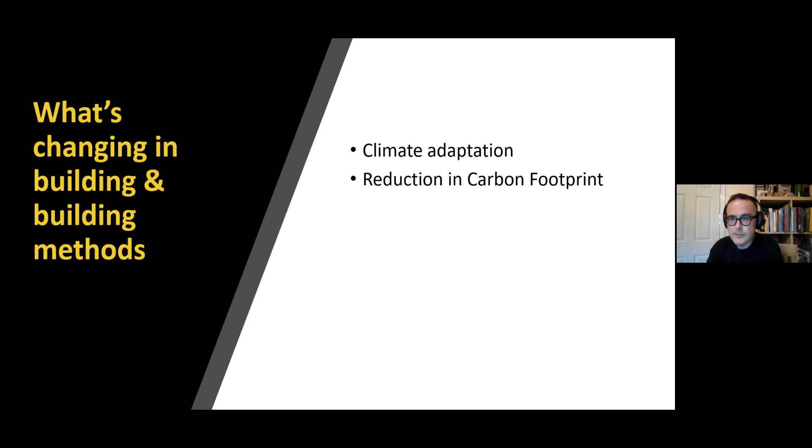Well, first of all, the reason why we're looking at the whole issue of efficiency and energy efficiency within our buildings is to deal with the whole issue surrounding climate adaptation. I think we're all familiar with that. It's been one of the highlighted topics in the United Nations General Assembly meeting this week, and has formed a major part of government policy here domestically as well as internationally. We need, of course, to reduce the overall carbon footprint of the economy and the domestic sector. And indeed, that is leading us to looking at new methods of building, new products for building, etc.

The age-old problem of housing demand and the need for additional building stock. This is coupled with the need to improve existing buildings, and that formed the major announcement from the Department of Housing there recently in relation to the Housing for All strategy document. Again, we're all familiar with the fact that housing demand is at a peak here in Ireland, and not just within the Dublin region. But equally, if we look further beyond our own shores, this is a major issue internationally, as well as nationally here as well.

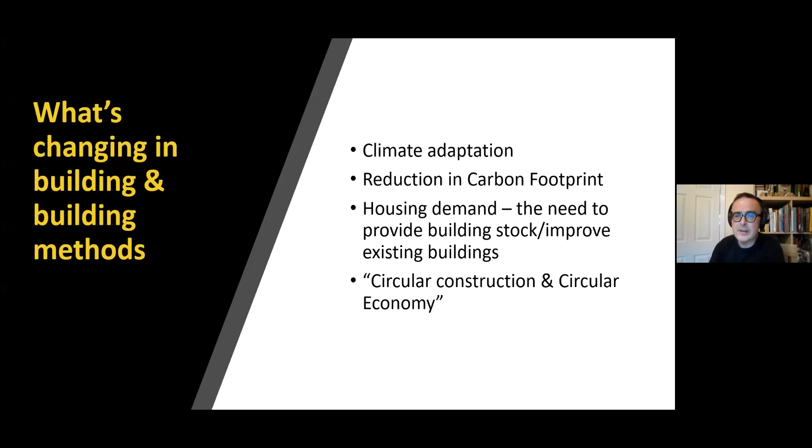And then finally, we have the issues around the circular construction and circular economy cycle. And I don't know if any of you or most of you are aware of this, but I will just basically recap on this.

Moving back to government policy and indeed the direction that the government and indeed the industry are heading towards, the Irish government produced a very, very ambitious document back in 2021, which is the Climate Action and Low Carbon Development Bill, which is a unique document in the sense that it transposes aspirational goals into legislation and commits Ireland to achieving net zero emissions by 2050 and securing a rather ambitious target of 51% reduction in emissions by 2030. Now, you realize the scale of that ambition when you realize that we are almost 3/4 of the way through 2021. That means we have approximately 8 years and 3 months to go to meet that target. So as I said, it is ambitious.

The action to achieve this, of course, as everybody knows, will see, first of all, an increased electrification of both the heat and transport sector.

We'll be looking at improving energy efficiency within buildings, reducing emissions from agriculture, and developing clean public transport. Now, while I won't bore you with item number 3, the reducing emissions from agriculture, because clearly I have very limited expertise in that, tonight's talk will be looking at various issues around item 1 and item 2. I think I'll leave the discussion around cleaner public transport for those that are more qualified in the area of transportation.

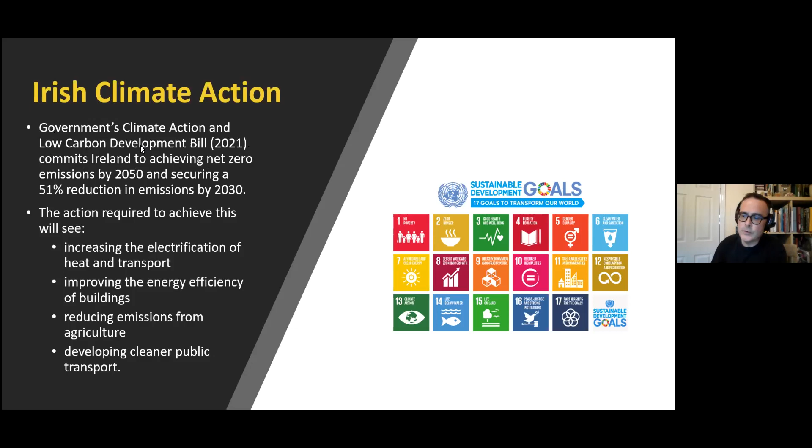If we look here to the right, I'm sure everybody has seen this statement here, the 17 sustainable goals that have been produced by the United Nations. And that again provides the cornerstone to this particular document. As I said initially on the third slide or so, the whole issue behind the circular economy and circular construction is where we're going to go, whether we like it or not. This is a case where it'll cause us as engineers to rethink what materials we will be using within the various structures that we actually design and ultimately build.

To recap, circular buildings are buildings that are designed, planned, built, operated, maintained, and deconstructed in a manner consistent with circular economy principles. And there's a very good article there from the Irish Building Magazine in 2020 outlining how embracing this circular economy model can add value to the Irish construction sector. But we're all very familiar with the production cycle, and I'm just going to talk about this very generally. We all start off with raw materials, which go into a production plant, ultimately leading to the product being ready for distribution and sale. The product is then taken and installed. It goes through its design life, and it's maintained during that design period. So we're familiar with that green path.

Now, this is the path that's relatively new, in the sense that after the maintenance period, once the product has met its end of life or can no longer be economically sustained, or there's a change of use in the building which renders it, I won't say unfit for purpose, but certainly not desirable, then you have to go through the process of removal and the disassembly line. But this is where it becomes relatively new, in the sense that you're looking at using materials that can be maintained, removed, disassembled, and recycled. And this is, I think, the most challenging part of this model. How do we design products that are serviceable, easy to use, easy to maintain, but also easy to remove, disassemble, and then reincorporate back into the in-use cycle?

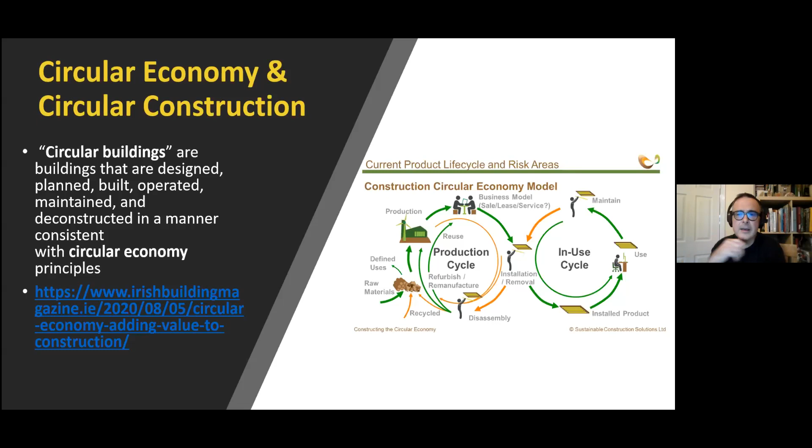As engineers, this is going to present us with significant challenges. And as I said at the very start, we have a major housing crisis in terms of supply, but equally as well in terms of retrofit. How do we make sure that the products that we put in to retrofit a house to improve its energy efficiency can slot into this particular cycle? Hopefully I'm not losing anybody so far.

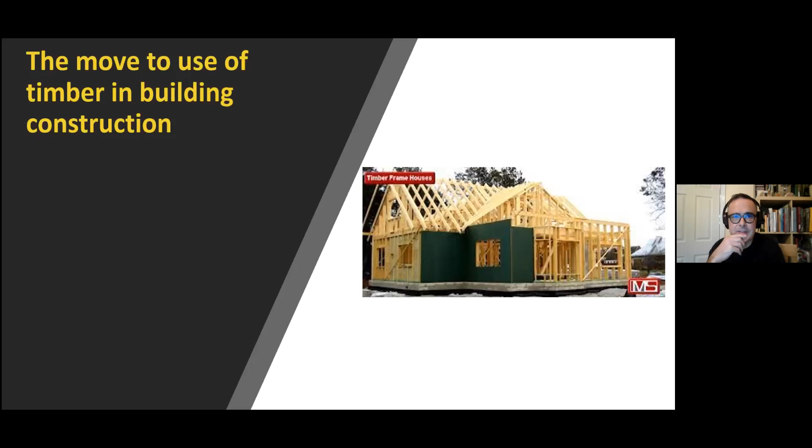So the next thing we're going to look at is the move to use timber in building construction. This is brought about by a number of factors, one of them being that timber sequesters or absorbs carbon during its growth process. Anybody that has done science for the Inter Cert will be familiar with photosynthesis, where a plant takes in carbon dioxide from the atmosphere, converts it into carbohydrate or sugar, and then releases oxygen as the byproduct of that reaction. So a plant as it grows removes carbon dioxide from the environment and releases oxygen to the atmosphere. And this is why timber is increasingly popular, because it's seen to be a green source of material.

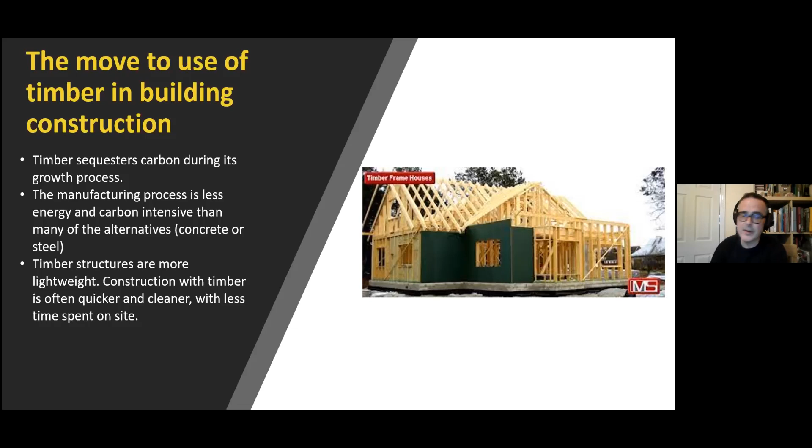The manufacturing process for timber is often thought to be lower in energy and less carbon intensive than its alternatives, whether those be steel or concrete. Timber structures themselves are extremely lightweight by comparison, and construction with timber is often quicker and cleaner, hence less time on site. And there is also a current trend for architectural desires for exposed timbers for well-being and aesthetic purposes. Anybody that has read any of the house magazine type articles knows the Scandi look is in. It was launched onto the market a number of years ago, and that trend for exposed timber hasn't left.

One thing that, of course, as engineers in Ireland, we're all familiar with is the fact that timber is all fine and dandy, except that we have issues here with dampness. Now, one could argue that, yes, we do have a damp environment, but if you look at the Scandinavian countries, they have similar levels of dampness. They have high thermal gradients throughout the year, and they successfully build in timber. So the question we have to ask ourselves is, if it's been embraced internationally, why in Ireland should we be any different?

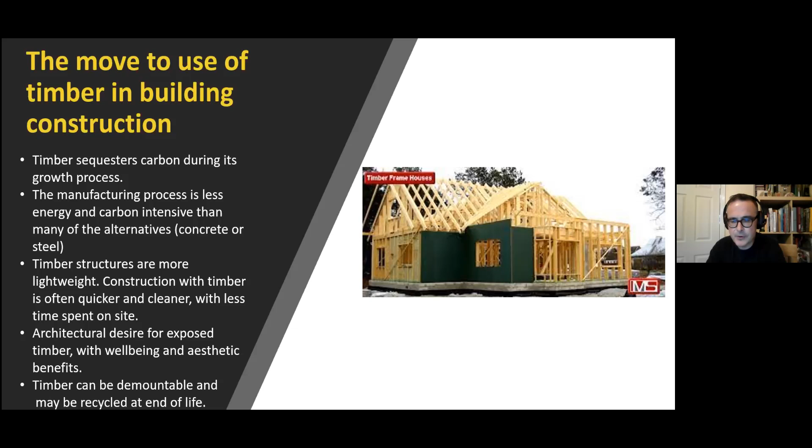Now, just to recap on the two different types of timber in construction, first of all, we have the larger scale size of timber, which you can see is broken down into two different types. These are basically mass timber for non-domestic buildings. The first one that everybody is coming to terms with is what's known as cross-laminated timber, where timber lats are laid at right angles to each other and glued. So in other words, you have a timber in one direction, a timber at 90 degrees, another timber at 90 degrees, and so on, where you have a beam or column element built up of strands of fibers orientated at 90 degrees to each other. And these sheets of timber are held by some sort of glue or resin product.

And then you have what we are all familiar with, I think, in various buildings in Ireland, the glue laminated timber, where you have boards or pieces of timber that are built up to provide a column or beam element, but all the grains of timber are traveling in the one direction. Now, if you remember your first or second year mechanics and materials from college, you'll appreciate that if a beam deflects like that and all the fibers are running in one direction, if you apply a load, there's going to be greater deflection in the center if you have a simply supported structure. However, if you have a cross-laminated timber, you have less deflection because the fibers are running at right angles to each other. So they're very, very good for large clear spans, where you want to minimize the deflection in terms of ultimate limit state and serviceability limit state requirements.

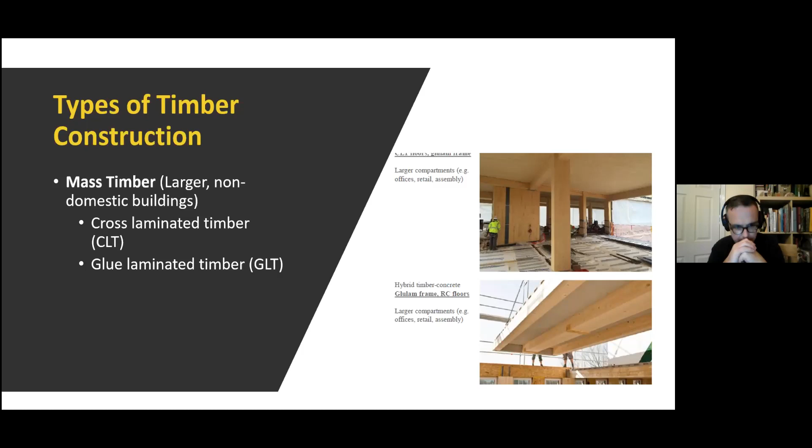The one thing you have to realize about these kind of structures, whether they be glue laminated or cross-laminated timber, is the fact that if they're being constructed, they're constructed on a robust concrete foundation with usually the first floor of the building. If you're looking at something that is, say, 3 or 4 stories high, you're looking at the first floor being a concrete structure. In other words, you're providing a concrete box, which is going to provide the podium level on which you construct your subsequent floors. So again, you must realize that the building isn't just a case of a timber building dropped onto a concrete foundation. It's a case of, to give the building structural rigidity, you have a concrete floor to act as your podium level to enable your construction heading up.

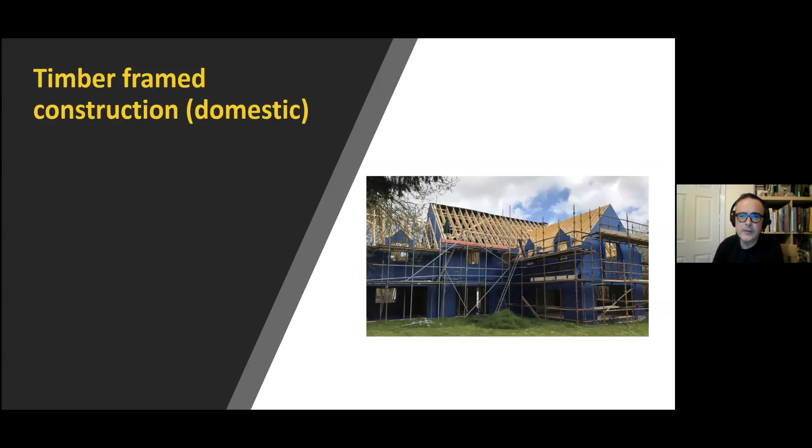So now moving from the kind of upper end, the mass timber element, we're moving into what we're all familiar with, the timber frame construction within the domestic sector, where we're looking at the use of OSB boards. It has become an increasingly popular build route, and timber frame is the method of choice because you can assemble a lot of the units off-site and then move them onto site via a low loader or another means of transport and assemble it quite quickly.

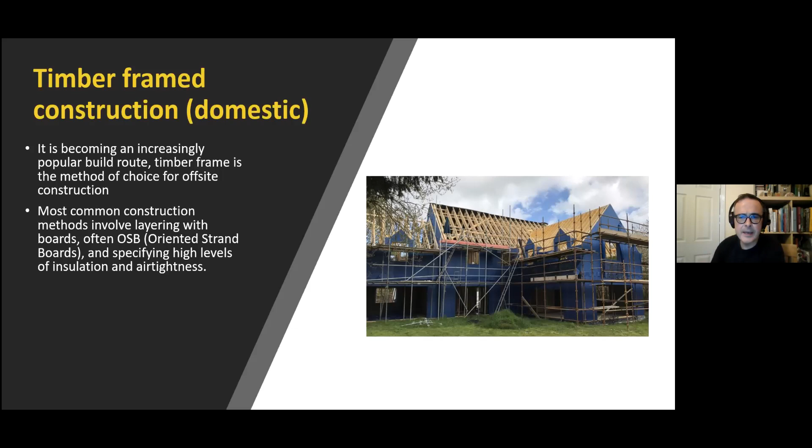As I said, the most common construction method involves layering with boards, usually OSB boards, oriented strand boards, and specifying high levels of insulation and air tightness. Again, looking at the whole issue surrounding climate, energy efficiency, and reducing the carbon footprint. The timber frame, by its nature, because it is a frame, allows you to incorporate a number of different elements in relation to the design.

And this is why timber frame in the domestic sector is very, very popular, because it allows designers and it allows the client to customize their home in a particular way in relation to how much or how little they want to spend on the structure. As I said, timber frame is often used as a structure on which to layer other eco-build materials.

The most recent ones I've seen used are straw bales, hempcrete, which is almost like the old medieval wattle and daub type finish, where you're applying a lime and a hemp mix to provide an insulation type material. And then, again going back to medieval times, a rammed earth solution.

Now, before we kicked off the discussion tonight, we were just talking about this, and I raised the point that there's a very, very good video from Underwriters Laboratories, looking at flammability rates within natural materials and synthetic materials. And speaking here with my fire helmet on, if you're looking at a comparative study between synthetic versus natural materials, this video will certainly push you to the use of naturally based materials rather than synthetic.

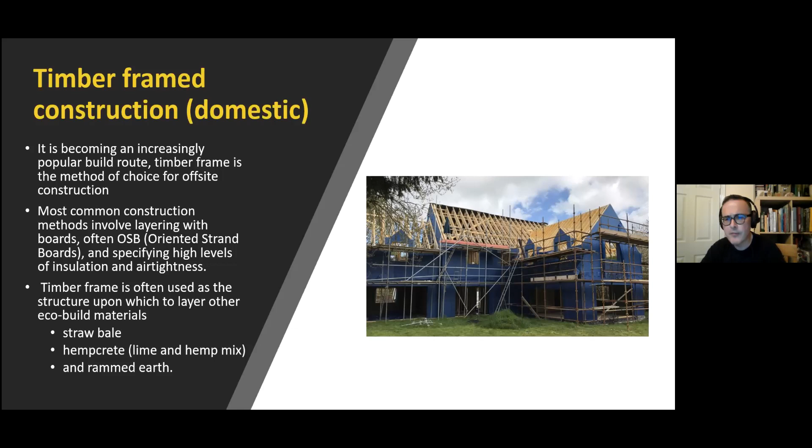And the reason for that is, and this is a kind of universal truth, that if you use synthetic materials, the heat release from the product is enormous. Equally, the rate of fire growth is significant. Whereas if you use products that are primarily organic or naturally based eco materials, the thermal reaction and thermal release rate is much, much slower, and the overall fire growth rate is much, much less. So that's an aside as we move on.

This is when it goes horribly wrong. This is taken from a fire in Belgium, in Herk-de-Stad, where, as normal, the fire occurred in the early hours of the morning around 3 a.m. And as you can see, unfortunately, timber frame in relation to fire doesn't hold particularly well. In fact, you can almost say with certainty that if timber frame is involved in a fire, the destruction will, most of the time, be total in comparison to conventional, traditional construction.

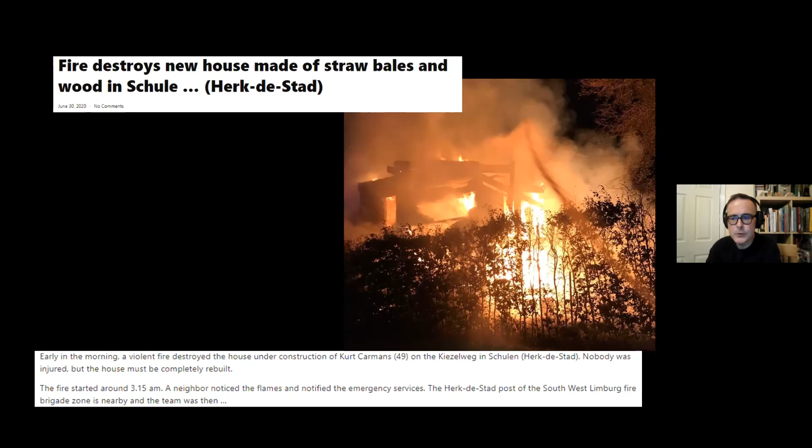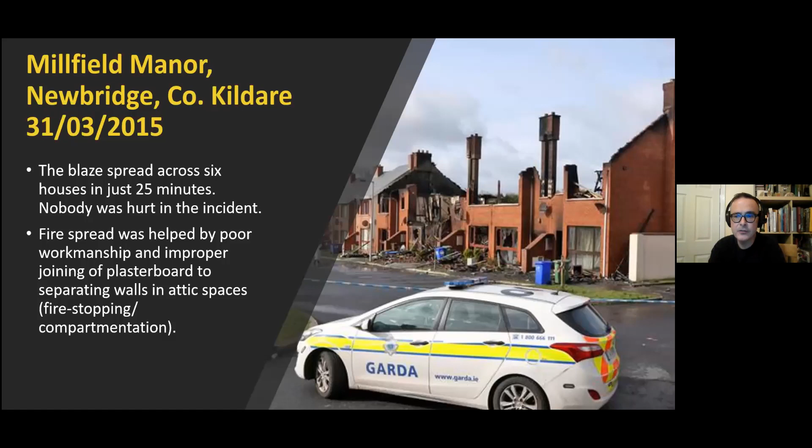The fire spread was helped by poor workmanship and improper joining of plasterboard to the separating walls in the attic spaces. So it was an issue around fire stopping and compartmentation. So just giving you another picture of that, that's the destruction in 25 minutes. Now this occurred at, I think, between 9:30 and 10:30 on a weekday morning, right?

Now, can you imagine if this was the same scenario, that fire was deliberately set at 2 a.m. or 3 a.m. in the morning, or indeed, if it wasn't a deliberate fire, that it was an accidental fire where somebody came in from a good night out and decided to cook themselves some sausages or whatever to absorb the alcohol taken the evening before, and the kitchen took off.

But look at the damage that you see. The roof is completely gone. At the seat of the fire the damage is total. But bearing in mind, these are 6 houses, and assuming, of course, that there are 4 people per house, that'd be 24 people that may or may not have been killed or seriously injured as a result of that single fire. Again, it's a sobering thought.

So going back to our friends in Arup's slide, as engineers, and particularly the engineers in the audience that are working in housing and in the local authority sector, or indeed in the private sector, if we're looking at the top line, in keeping with the demand for housing, the fact that the housing market is so aggressive and there is such a need, okay, fair enough, in a low rise, the firefighting methods and the evacuation, I'm not going to deal on that, but the consequence of failure is low and complete loss is acceptable.

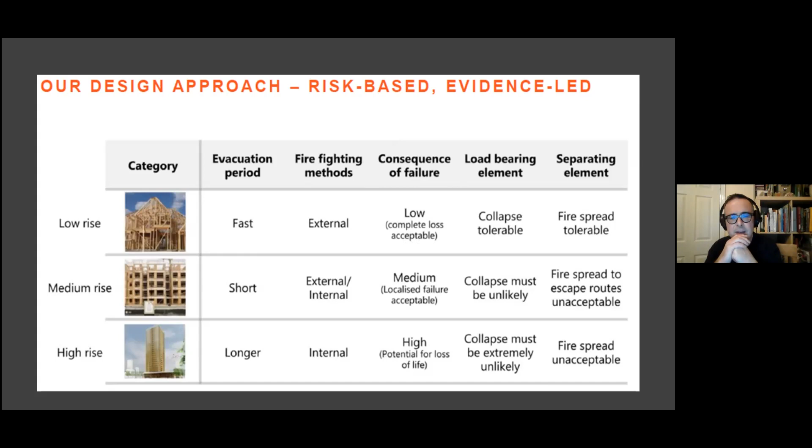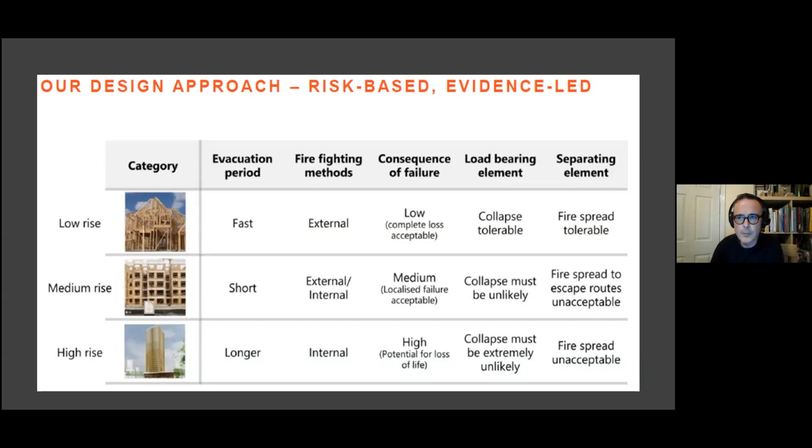Now that the buildings have failed, all 6 of them are gone, can we, as engineers who are dealing with a housing crisis, for want of a better word, say that that level of losses is acceptable? And particularly for us here in the Midlands, who are dealing with rural communities or smaller urban communities, can you imagine that kind of load on your housing sector and in your housing offices on a daily basis? I shudder to think of it. And this is coming from somebody who worked in housing and had to deal with people who were homeless, or on the housing list looking for suitable accommodation.

So moving on to the issue of lithium-ion batteries, as I said, this is a very holistic, 360-degree view of energy efficiency and some of its pitfalls. And what I'm trying to do tonight is not to be provocative, but certainly to promote a certain degree of discussion and get people thinking about what they're designing, how they're designing, and the inherent risks that those designs may have. As Frankie Byrne used to say years ago, maybe not today, maybe not tomorrow, but soon.

But first of all, let me go back to the topic at hand, and that is the introduction to lithium-ion batteries. The lithium-ion battery industry is massive. It's a growing market internationally. In the area of transportation, we have lithium-ion batteries in cars, buses, forklifts, auto bicycles, scooters, etc. Consumer electronic devices is huge: smartphones, laptops, tablets, power tools, personal care, your shaver, your Braun toothbrush, etc. But also in the grid energy sector, in stationary energy storage, the renewable energy sector, which we're going to talk about shortly, and portable energy storage systems as well.

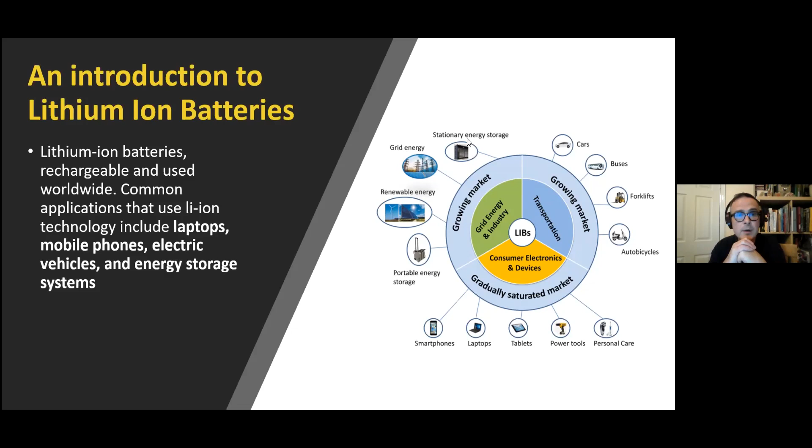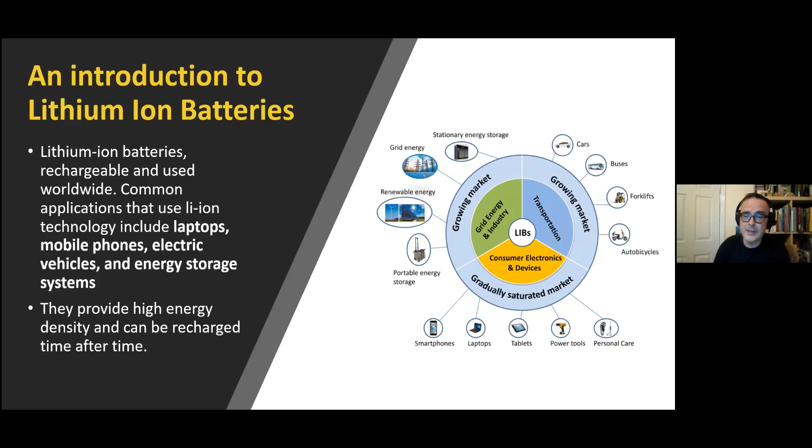So moving on there, as I said, lithium-ion batteries are rechargeable and used worldwide. Common applications that use lithium-ion technology include laptops, mobile phones, electric vehicles, and energy storage systems. I've already covered that in that graphic. And the reason they're very, very popular is because they produce a high energy density and can be recharged time after time. And that's the beauty of them, the fact that they are rechargeable and they hold their charge extremely well.

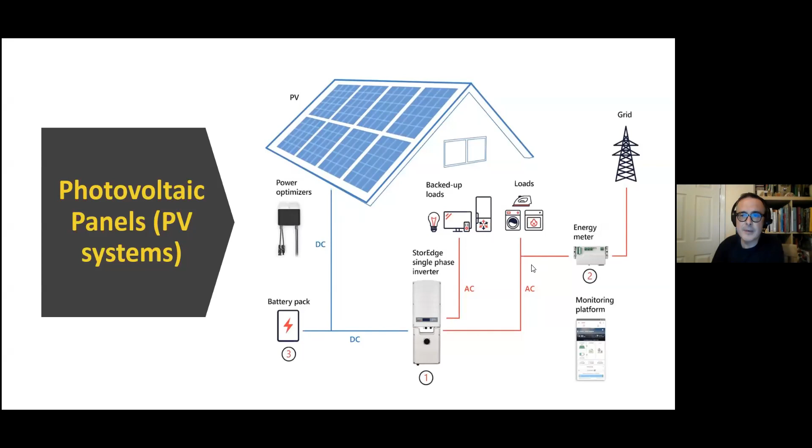Moving on to our PV panel systems, I think we're all familiar with the concept. PV panels on your roof facing in a southerly direction, leading to power optimizers and a battery pack, which in turn feed into an inverter, which converts the DC electric current produced into AC, which in turn can be used to power up your domestic appliances or heat water, etc. And then any surplus, depending on the amount produced, can go into the national grid.

As I said, the PV panel system is very, very straightforward. Solar panels where the sunlight shines on the roof, providing the DC electricity. The bracket system, of course, supporting the panels onto the roof. The inverter, which uses technology to convert or transform the power from DC to AC, so it can be used to power the home. The electricity itself, then produced and consumed on the domestic premises. The diverter unit, which allows feeding into the grid.

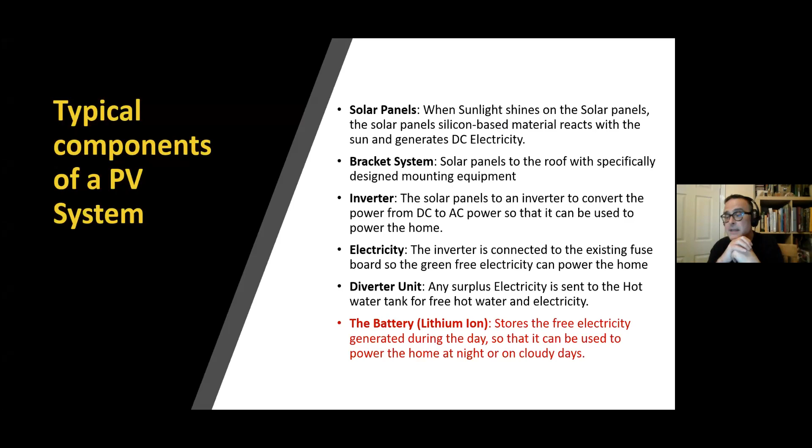And here in red, what people don't realize, the use of a lithium-ion battery, which stores the free electricity generated during the day so that it can be used to power the home at night or on cloudy days. And this is the reason why I wanted to introduce you to the issues around lithium-ion batteries. We're all familiar with them. We know that they're out there because we use them every day and we don't think about it. I'm actually using one right now on the laptop and I have my mobile phone here beside me, both powered by lithium-ion.

But here's the rub. Lithium-ion batteries themselves are capable of spontaneous ignition and subsequent explosion. And these conditions that lead to the spontaneous ignition and subsequent explosion are called abuse conditions. Abuse conditions can be caused by a number of factors, one being overheating, two being rapid discharge, or electrical shorting. Overcharging of the batteries again, and I think most of us are familiar with that: we charge a particular device, whether it be a tablet or a laptop or even a shaver or electric toothbrush, and can find that there is a residual amount of heat when you touch it.

What is more disturbing is the fact that you may have abuse conditions caused by defects or poor designs of the batteries where they're not adequately ventilated. This is particularly true in relation to laptops where, for example, the ventilation isn't very good around them or it hasn't been designed properly, and you in turn leave it on a desk or in direct sunlight, or there's no ventilation in the area, which in turn leads to the device overheating.

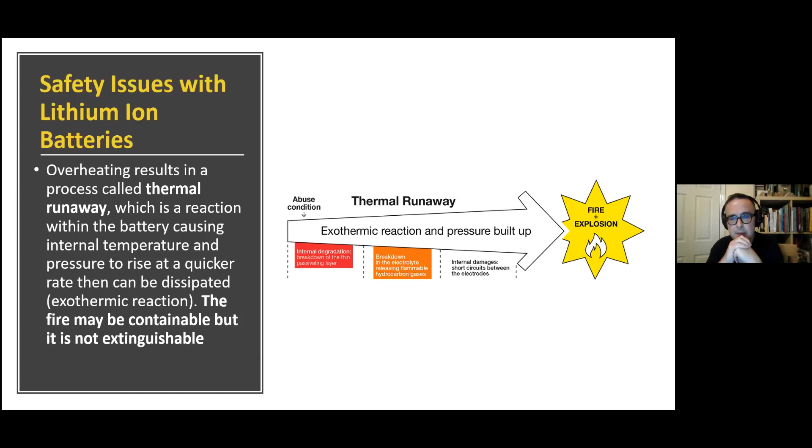Now, the problem is, if you're dealing with any of these in terms of a fire situation, the more water you put on it, the more harmful materials you're actually introducing into the surface water runoff. And this creates an environmental risk, because you're dealing with lithium, which is the lightest metal on the periodic table, but also you are producing byproducts which are pollutants.

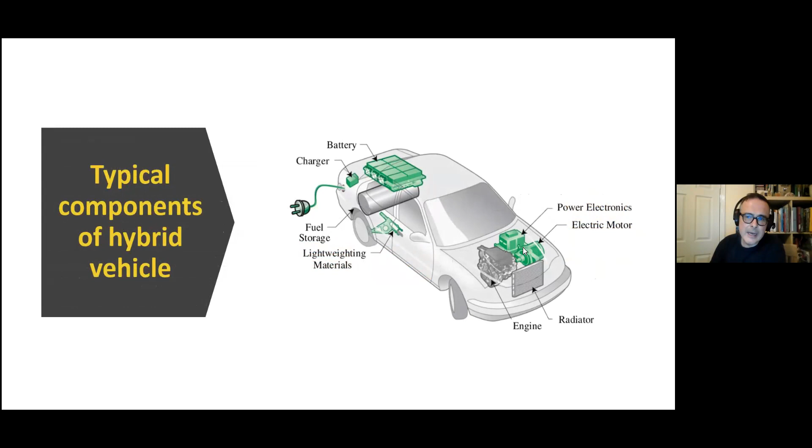Looking at our friendly electric vehicle, you can see here that this is a very simplistic schematic, but you have a battery backup in the rear to supplement your fuel tank, and you have a dual motor system here, which allows for a measure by which the electric motor can take over from the conventional motor. Again, these are powered primarily by lithium-ion batteries.

And just going through the science a little bit, if you're to burn a car, it produces what's known as, for design purposes, a 5 megawatt fire. And that's comparable to your standard fossil fuel vehicle, whether you drive petrol or diesel. The problem is that it's not a traditional 5 megawatt fire. A 5 megawatt fire in a conventional car fire, whether it be petrol or diesel, is relatively easy to extinguish.

If you have a lithium-ion battery, as we saw two slides ago, involved in a fire, involved in something that leads to an abuse condition, you end up with this process of thermal runaway, where you have now got an exothermic reaction. In other words, a fire that is self-sustaining, and the difficulty is in extinguishing that.

Equally, as you saw from the schematic of the car, the fuel tank is close to the batteries. Usually the batteries are on the chassis floor, very close to it. It means that they're effectively insulated to a large degree from damage. But equally, if there's a fire or any sort of abuse condition going into the battery itself, then you're in serious, serious trouble.

If you ever deal with an electric vehicle fire, the problem is that you need a large amount of water to cool the area. I'm currently working with colleagues in various fire services in Belgium, Denmark, Germany, and Spain. And their reaction is quite simply this: if it's not a risk to anybody and the vehicle is already on the hard shoulder, you just let it burn completely.

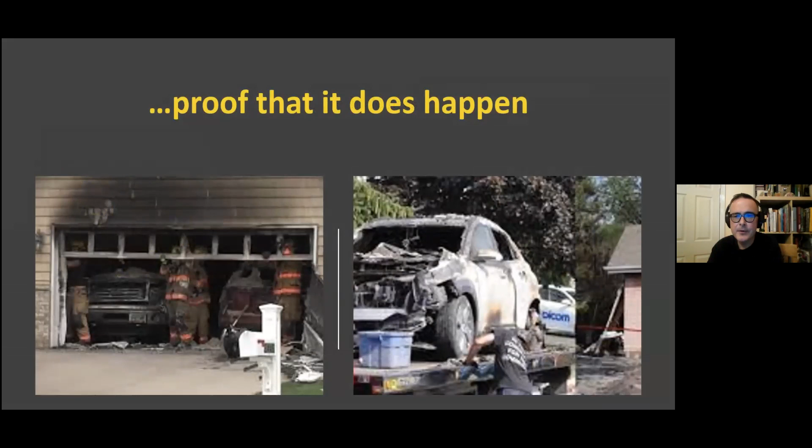So a scenario here that I just want to discuss with you all is that we have a timber framed house with a PV panel on our south facing roof. And we're just coming back from the game of golf, pitch and putt, whatever club you're affiliated to, and you charge your electric vehicle or your hybrid vehicle from your domestic charger outlet. Can you see the potential hazards here over what we have been dealing with in terms of conventional construction in the recent past?

Like, you have a timber framed house with a PV panel, with an electric vehicle. So excluding the domestic setup and the amount of lithium-ion that you would have in the house, on your laptop, on your other smaller devices, you will have a fairly substantial lithium-ion battery here on the PV panel. You will have a significant lithium-ion battery here in your vehicle.

And the question you have to ask yourself is, I'm sure if you have an electric vehicle, like all cars, you'll have them serviced and tested on a regular basis. But if you're installing a PV system, how often is that being maintained and inspected? And how regularly is the lithium-ion battery that is part of the actual setup being investigated, looked at, serviced, monitored, etc.? And rest assured, I can honestly say, hand on heart, that if you're driving an electric vehicle, you can be sure that that gets more attention than what's in here.

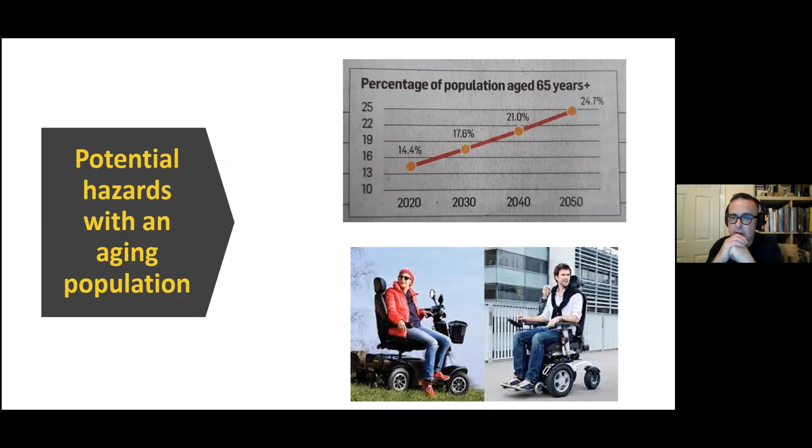And again, naturally enough, they won't be parked in the garage, they'll be parked in the front hall, or close to the front door, or close to the back door, wherever it's easy for you or your significant other to get on or get off. But my point is this, that if you have a significant unit of these powered by a significant lithium-ion source and something happens, the fire, as I mentioned a moment ago, will be significant, and the potential loss of property and, more importantly, loss of life will be equally significant.

So everybody, to conclude, and hopefully I haven't bored you all to tears, we must realize that we're living in a constantly changing commercial environment with new products and new technologies, and that's a universal truth. It was true 50 years ago, 20 years ago, and it's true today. But unlike recent years, there are now increasing legislative requirements and national and international climate targets to be reached and achieved. And these are ambitious targets, both domestically and internationally.

As engineers, we are duty bound to consider the hazards and associated risks in building new builds, but also in renovating and retrospectively dealing with an existing housing stock. One thing that we have to realize is that if we are putting products into new builds or indeed into retrofitting, the technologies themselves will change, and indeed the technologies incorporated into the building during its lifespan will change. But the building, the building structure, the building footprint and indeed its skeleton will endure. The point I was making before we kicked off is the fact that yes, there is a rush to use ready-made products because they're handy, convenient, and available.